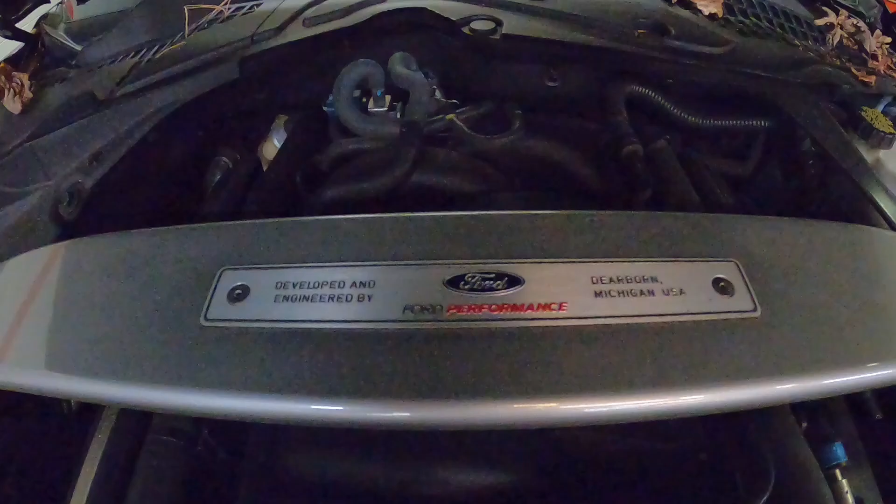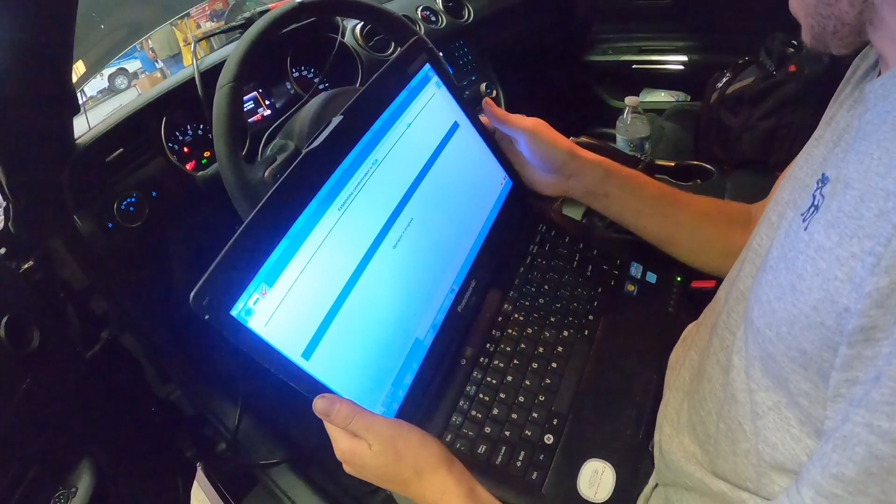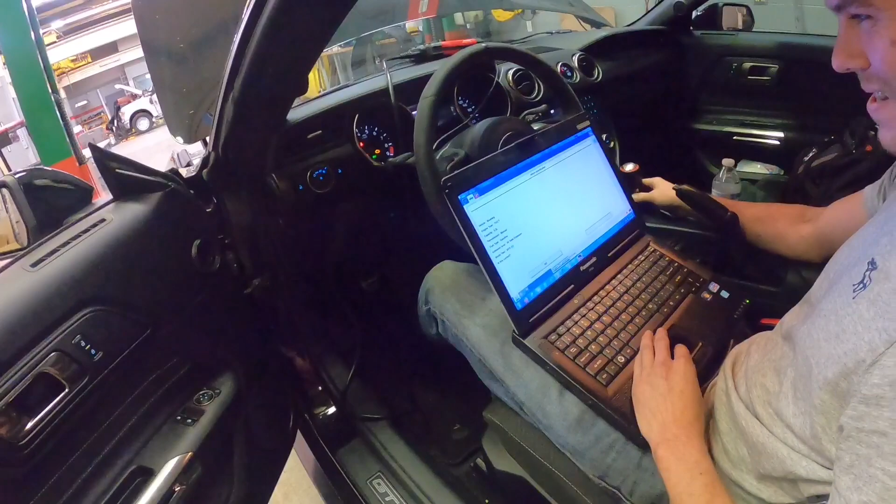So before I start taking this thing apart, my guy Smokey over here is gonna do a compression test or balance test, right? Sure. What are you doing? I don't even know. Checking compression. Compression and balance test, right? Yeah. Checking for codes. A bunch of codes. Why is there a check engine light on, dude? You're welcome. Now we want to make sure that everything checks out before I take this engine apart.

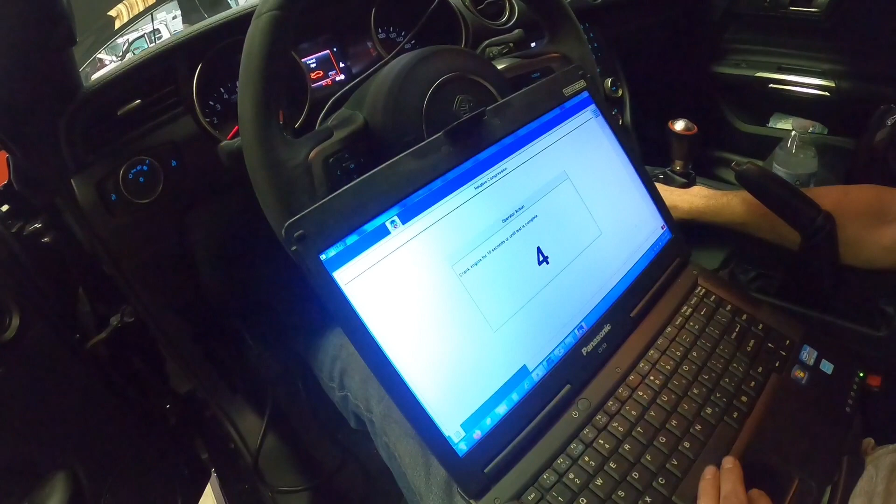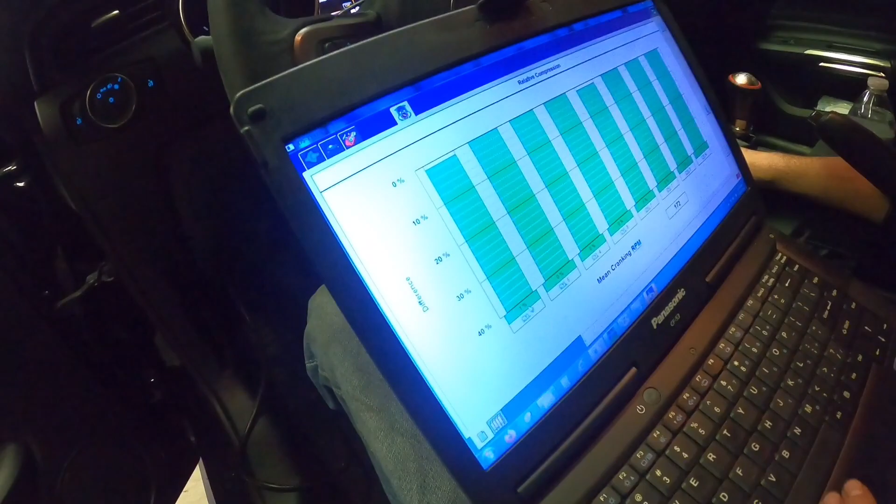Slow down, dude. Slow down. Engine failure. What? Ready. Ooh. Perfect. Is it? I mean, 1% there and 1% there. What? It's a false reading. Okay, that's all green. You're reading the fuel? No, we're checking compression. Oh, really? Yeah. How's that? It's looking good, which is good.

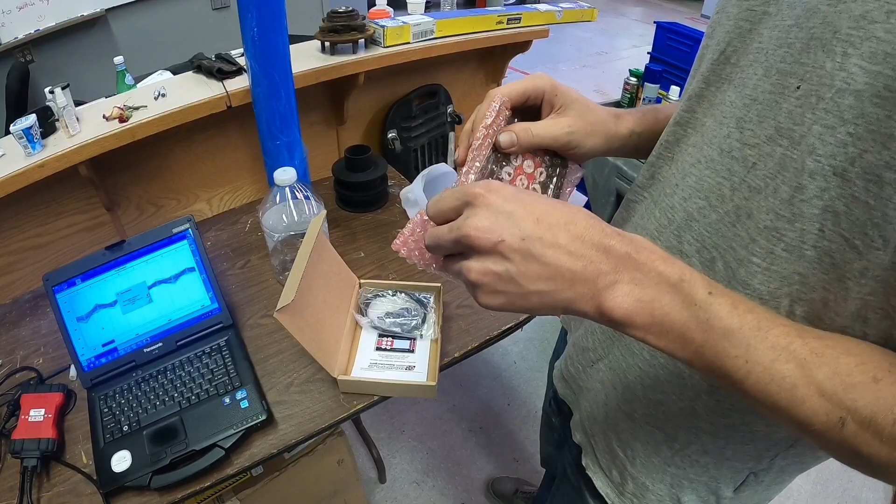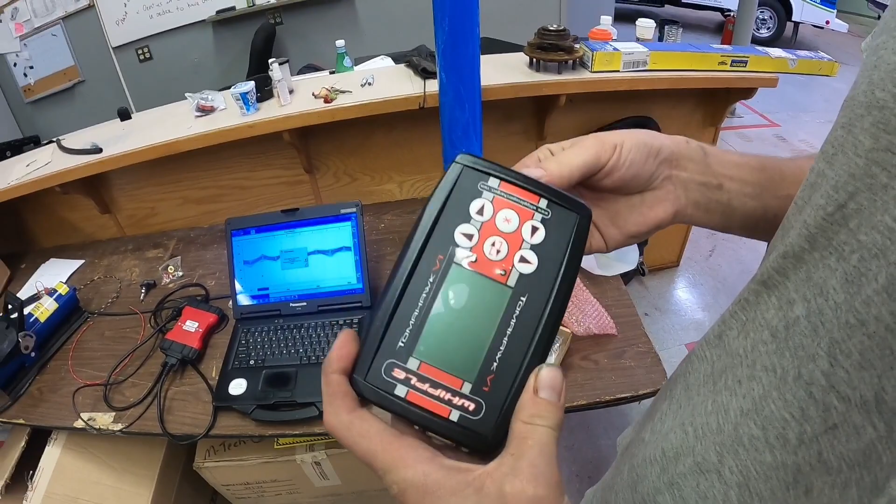I'm happy. Yeah, they can just do a drag strip? Later. Yeah. Sunday. Is that a Game Boy Color? Yeah. So satisfying to open new devices like that, right? What kind of game is that? Super Mario. Super Mario, cool.

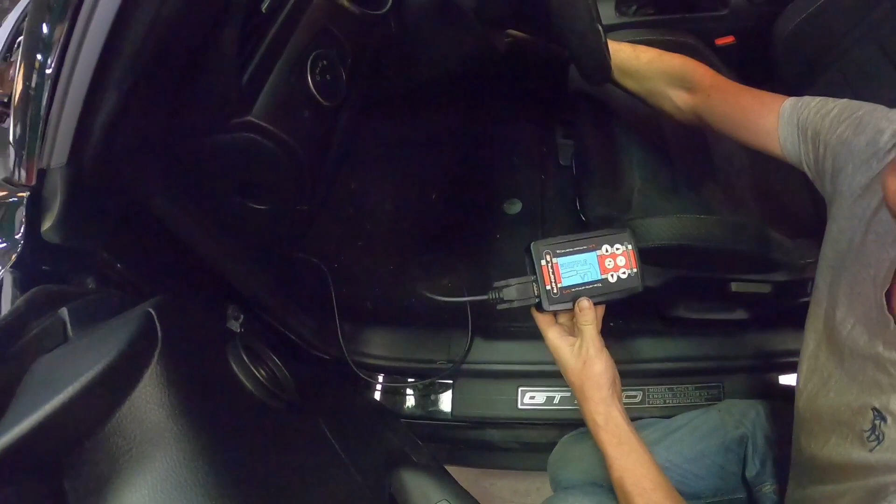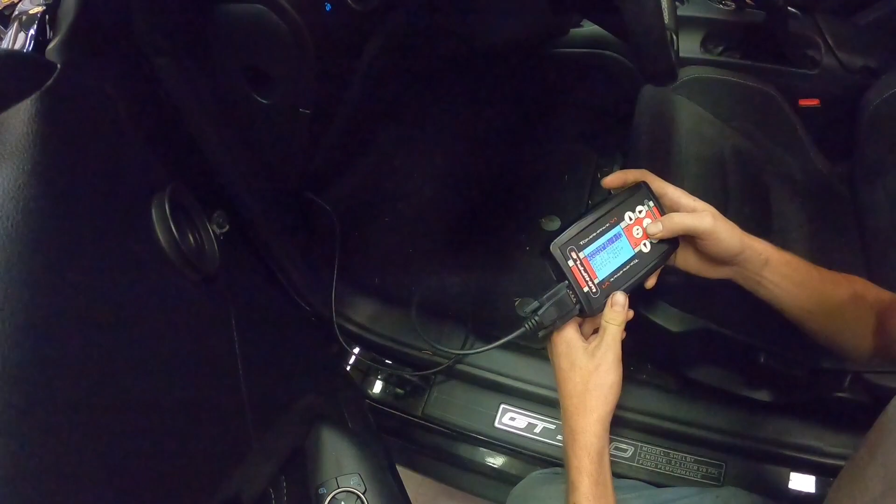Requesting a calibration from Whipple. Alright. That's it? It's requested. Really? Yep. Sweet. Thanks, man. Yeah. 24 hours. You get it. Or less. Alright, so I think we're ready to go.

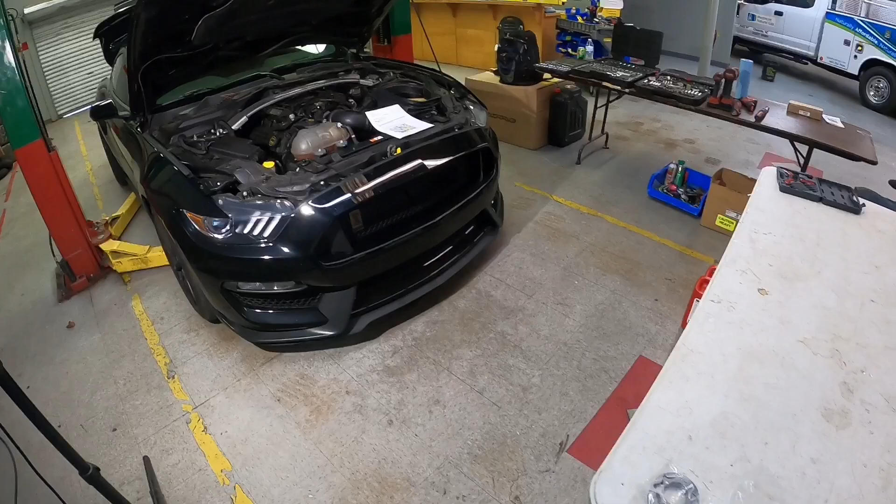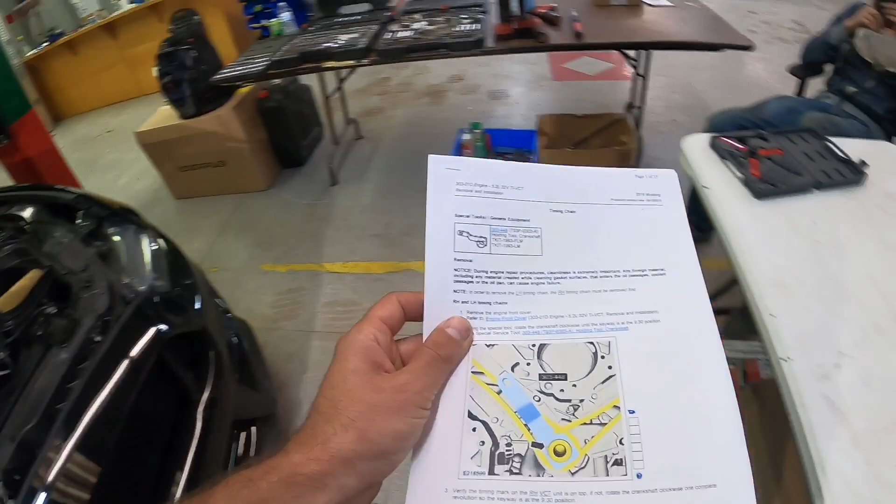Before I install the Whipple kit, I've got the new oil pump gears. Billet from Boundary. And also new, whatever that's called, gear. Is that gear? Yeah. The thing that holds the chain. Yeah. It's a bicycle sprocket. Bicycle sprocket for wheelies. Yeah. So Smokey here provided some instructions, and he said he's gonna do it for me.

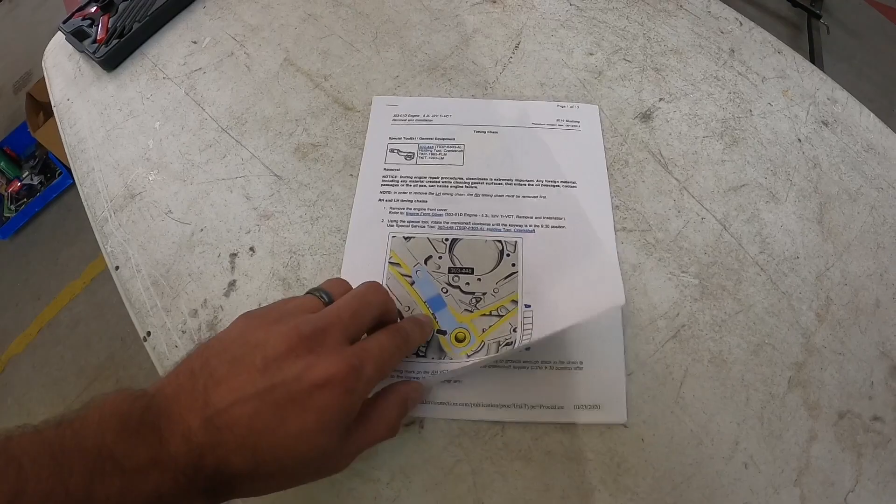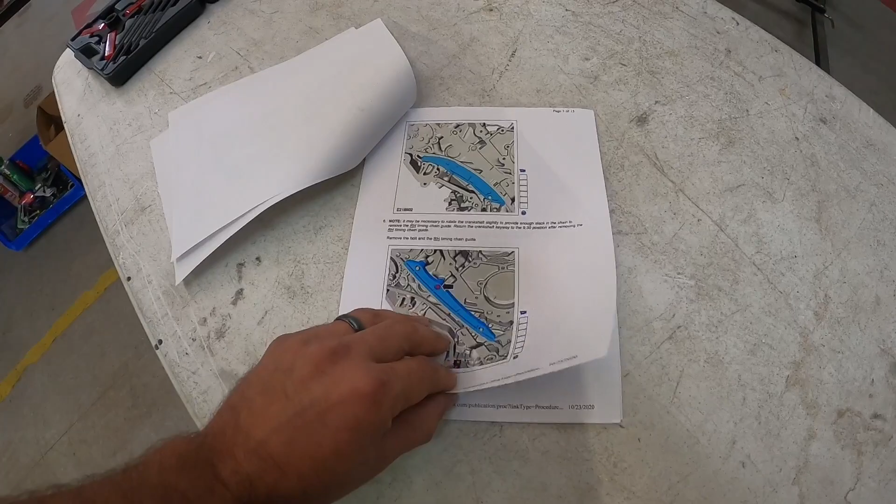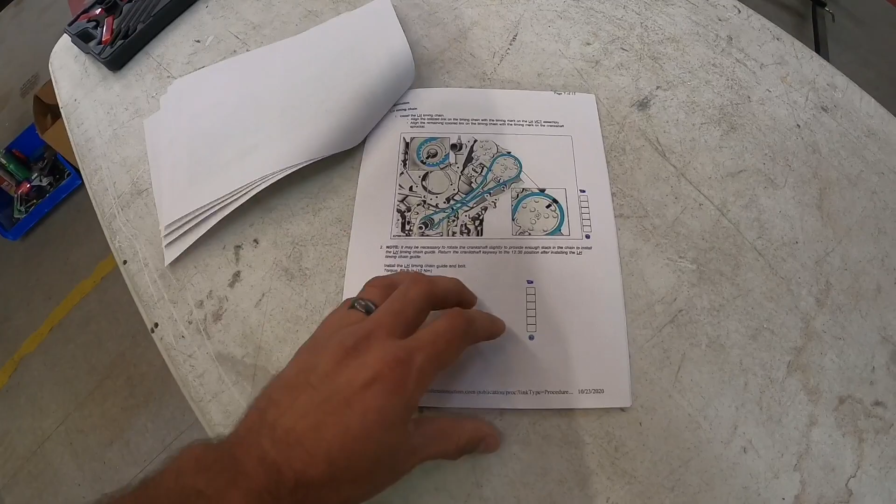And first thing, I don't have this tool, so what am I gonna do? Not use it. Yeah, it looks pretty simple. Remove that, remove the bolt, turn it, position it, don't turn it backwards, put the bolts back in, and you're good. Right? Cool.

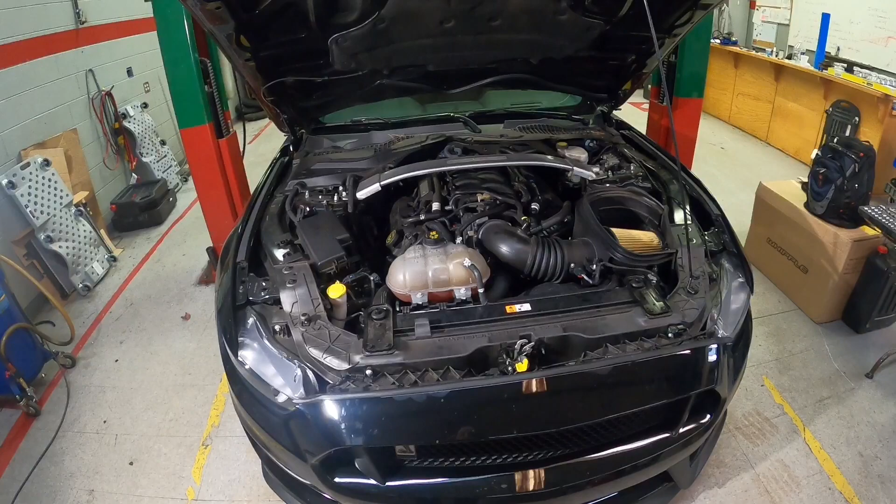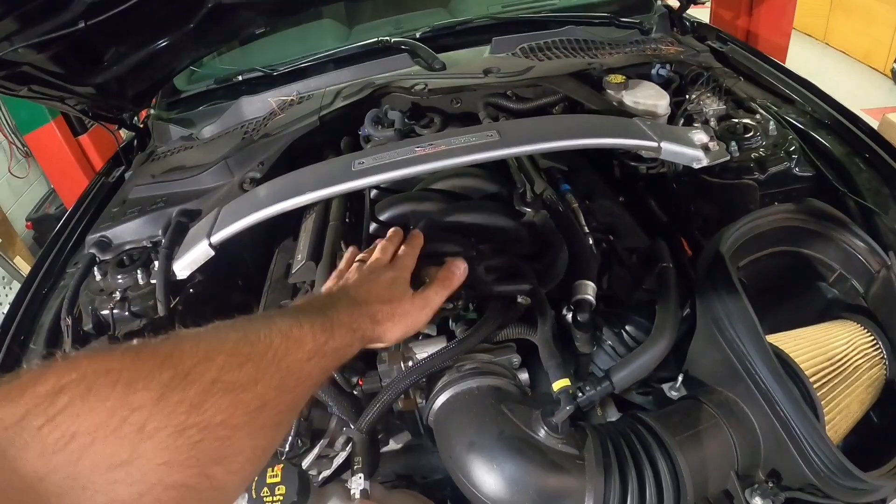So what I'm gonna do is take the front bumper off, drain the coolant, take the shields off underneath, drain the fluids, I'm gonna drain the oil also, and then supposed to drop the oil pan a little bit, so I'm guessing I'm gonna have to lift the engine up a little bit, which I have to do anyways because I gotta replace the motor mount brackets to lower the engine so the Whipple can clear this. Well, that doesn't get reinstalled, so the Whipple clears the hood, or we could just remove the hood or cut a hole in the hood. Sounds like it's easier to do that. Yeah. All right, let's do it.

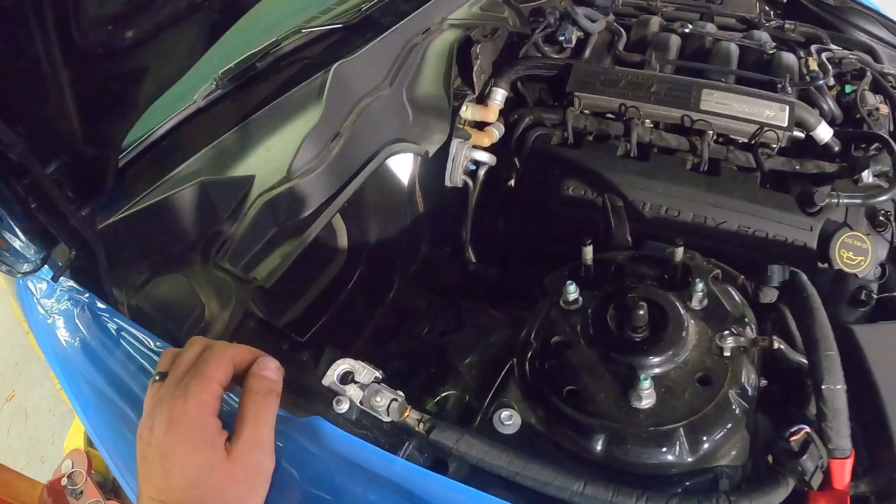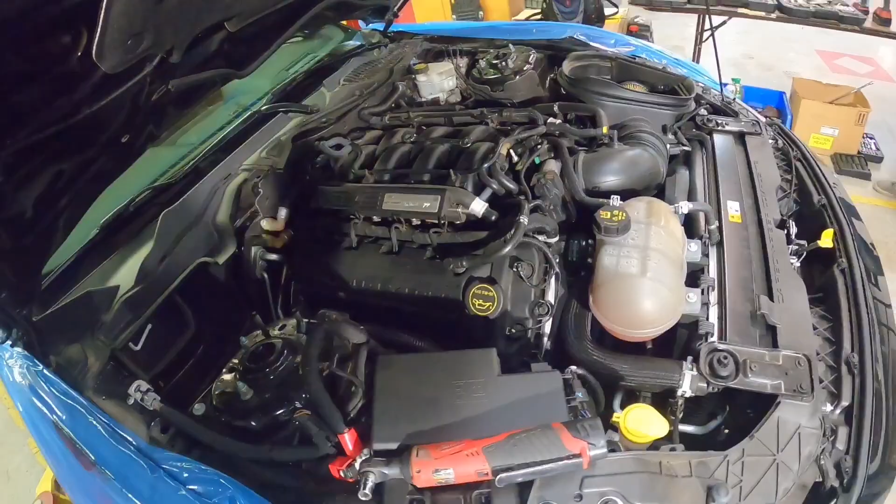Alright, so I got the battery out, battery tray out, the shield here out, strut tower, right? Strut tower, both of them out. Now I have easy access to this valve cover here because I'll have to pop that out. Strut bar. Strut bar, yep, that's what I was saying. And on this side, it's pretty easy access also. You gotta pop both valve covers off, pull the intake, drop the oil pan, and remove the front engine cover.

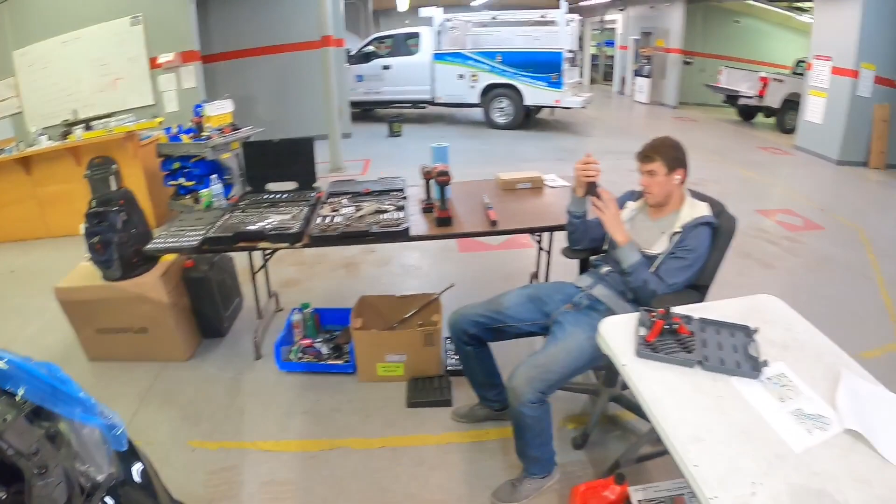So, yep. My helper over here is Facebooking live. Thanks, man. Yeah.

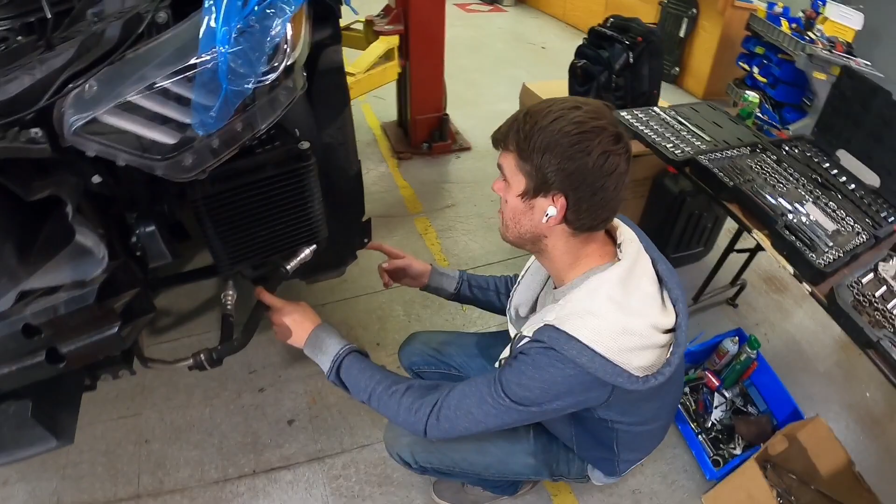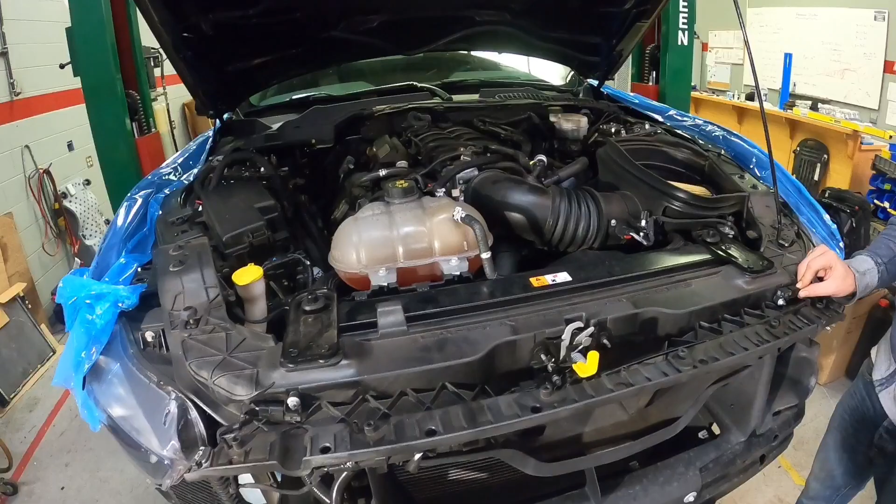Got the front bumper removed. Totally forgot to record it because of this guy. He's distracting me. But what's next? Put it back together. No, not yet. Gotta drain this coolant, drain the oil, and just remove the intake and lift up this engine a little bit. Yep.

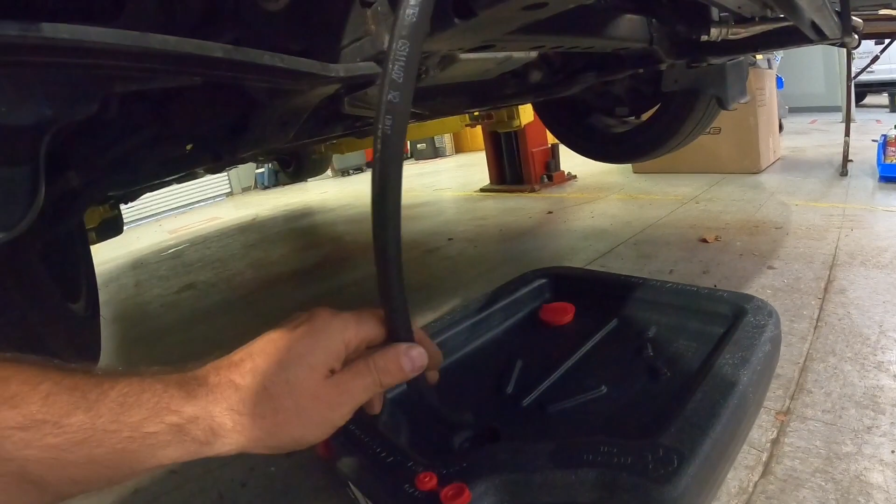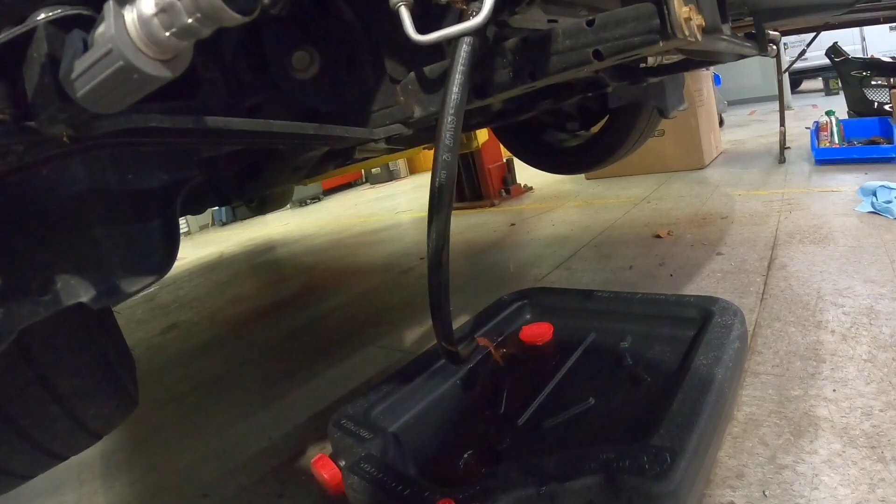Let's drain this coolant here on the passenger side. I've got a little hose connected here just so it doesn't splash everywhere. And you just turn this knob here and there it goes. There goes the coolant. Okay, gotta open this cap so there's air going in. It'll drain faster. There we go. Oh, why is it going everywhere?

So while that coolant is draining, I'm going to start removing stuff under the hood here. Starting with this filter, this coolant reservoir here, and the fans. That way I'll have access to the crank pulley. And I'll remove the pulleys and all of that, remove the spark plugs, remove the intake, cover the holes up with a plate just so nothing falls in, and go from there. Valve covers, and keep going.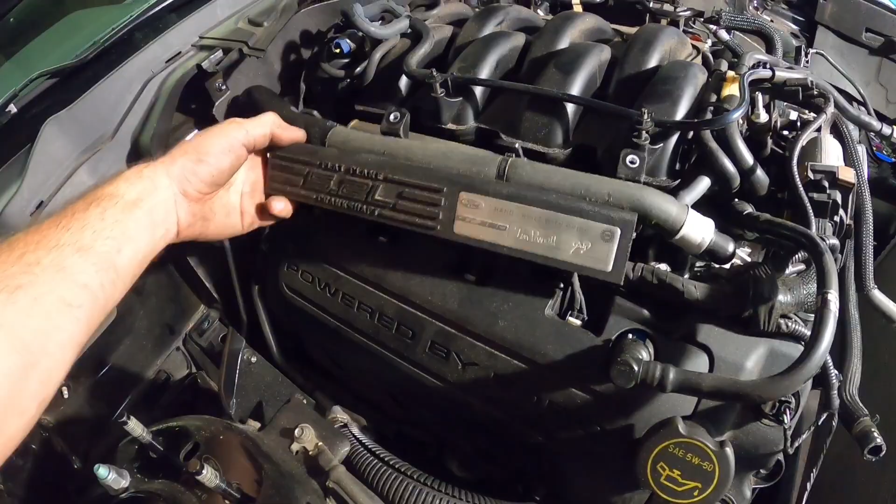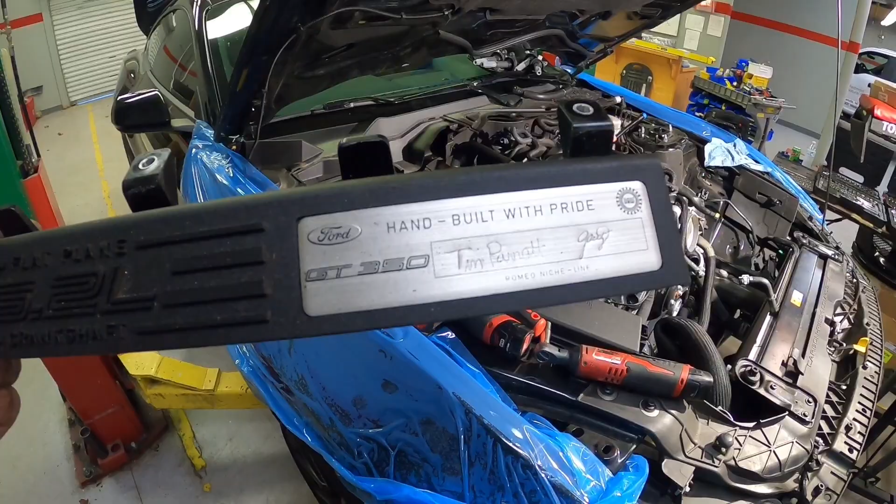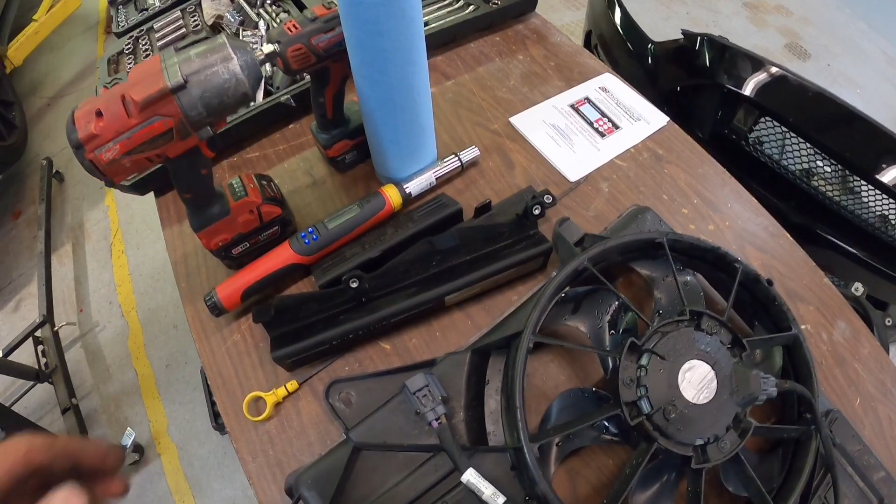Thank you, Tim. I don't know how to say the last name, but thank you, Tim, for building this engine for me. I appreciate it. But I am sad I can't install these parts back on with the Whipple on it. But I will save them.

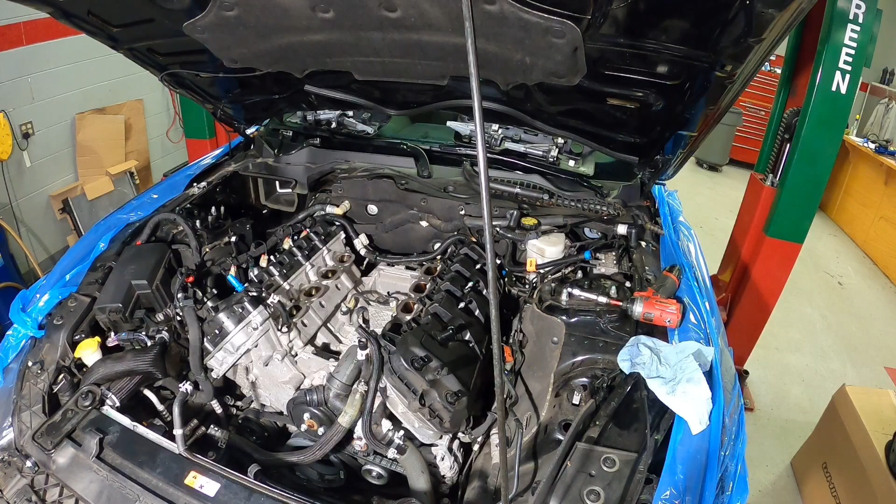Got this custom plate that I made last time I did an engine swap on the 5.0 Mustang, and it works great to cover up the holes so nothing falls in, and also to lift the engine out or up, just to hold it up in the air so I can work underneath and do what I gotta do.

So you can get these plates online, but I didn't have time for that, so last time I just welded one up, put two ears on it, just so if I need to go in the front of the engine more, or in the middle, it works great.

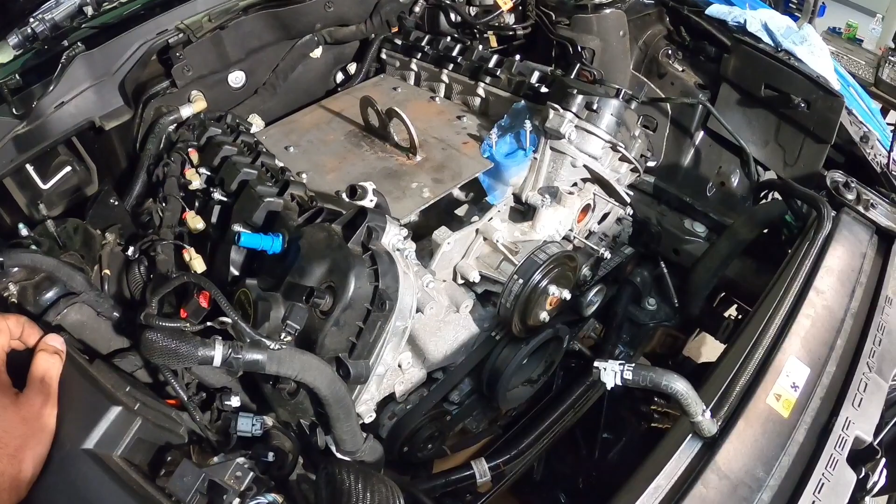So as I'm taking this apart, I started thinking, what if the previous owner already upgraded the oil pump gears and I'm doing this for no reason? That would be crazy, but I just don't see any signs of someone getting in here before. Everything looks original, so I'm hoping nobody was in here before, because I'm just wasting my time doing it again. But if I take it apart and it was upgraded, I'm still gonna change it just because I already have it and all that work, and I'm just gonna put a new one on regardless.

But I just don't think anyone has been in this engine before. I bought this car used. It had, I think, 10,000 miles on it, and it's a 2016. So I'm not sure, but I guess we'll find out.

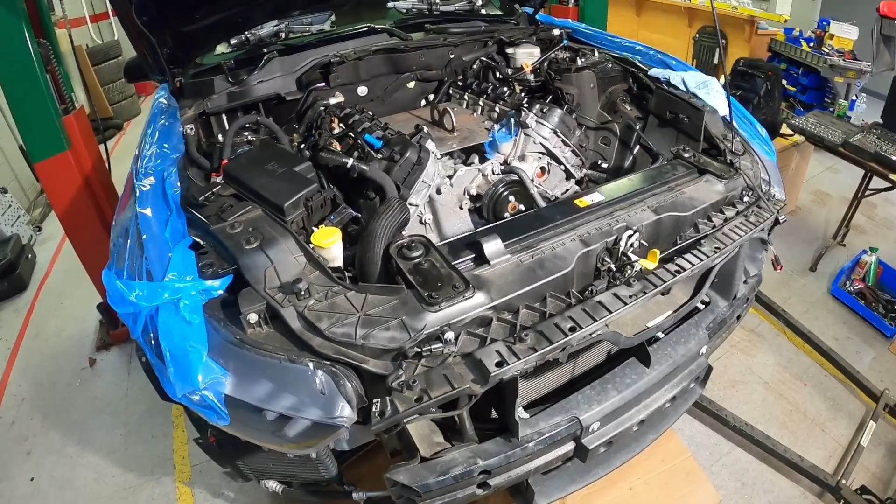I'm gonna pop these belts off. I believe I gotta remove the water pump. I don't remember. I think I do, because it looks like it's in the way. Yeah, definitely in the way because of this. So I gotta remove that and make a bigger mess. No matter how you drain this coolant, every hose you remove, you're still spilling coolant. So I just put a piece of cardboard under there to kind of absorb the coolant that doesn't make it into the drain pan.

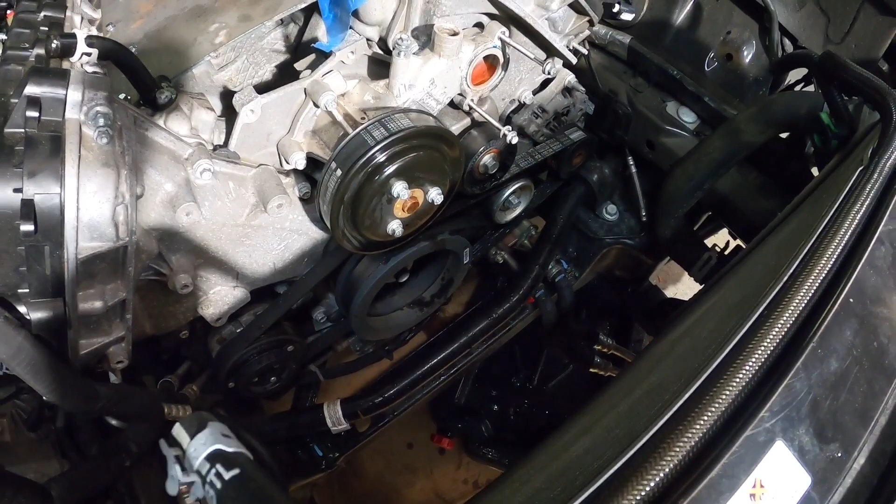There's gonna be way more coolant coming out once I remove the water pump, but nothing I can do about it. There's no other way. So let's continue this upgrade.

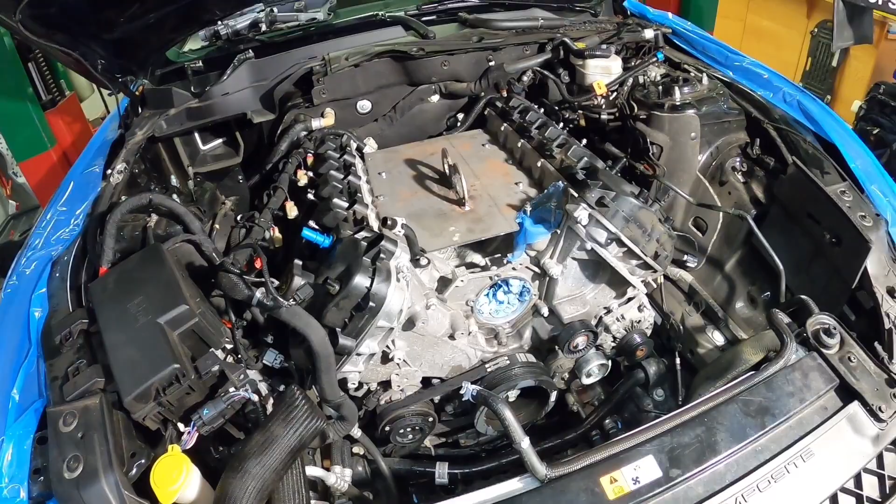Water pump is out. Now I have to rotate the engine to get this AC belt off, and to rotate it I'm going to pull the spark plugs out just so it's easier to turn the engine, and I believe I turn it clockwise, and I'm told that these engines do not want to be turned the other way because things could go wrong, especially when you're messing with timing. So clockwise only. Let's get it going.

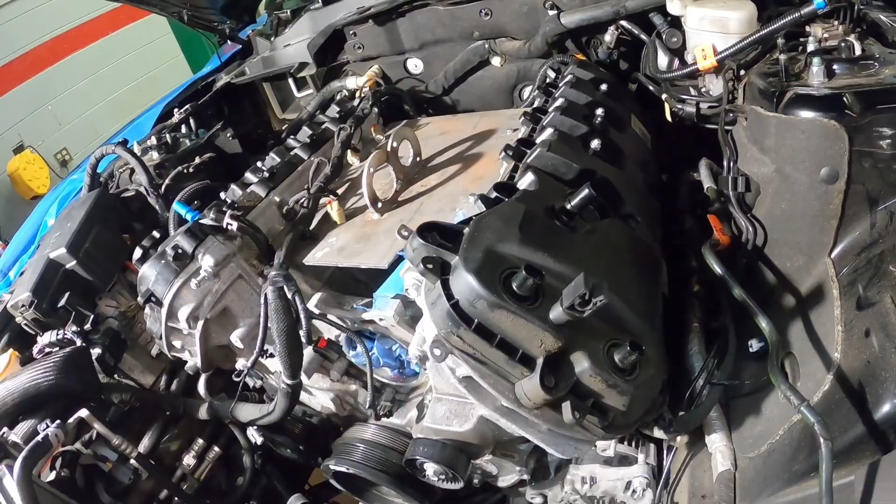At this point, looks like I'll remove the valve covers, because once I lift the engine up a couple inches to drop the oil pan, I won't be able to remove this valve cover because it'll be very tight over there on the driver's side. Passenger side is not bad, it's wide open, but over there by the brake booster it's pretty tight. So I'll remove the valve covers and then lift up the engine with that jack and secure it somehow.

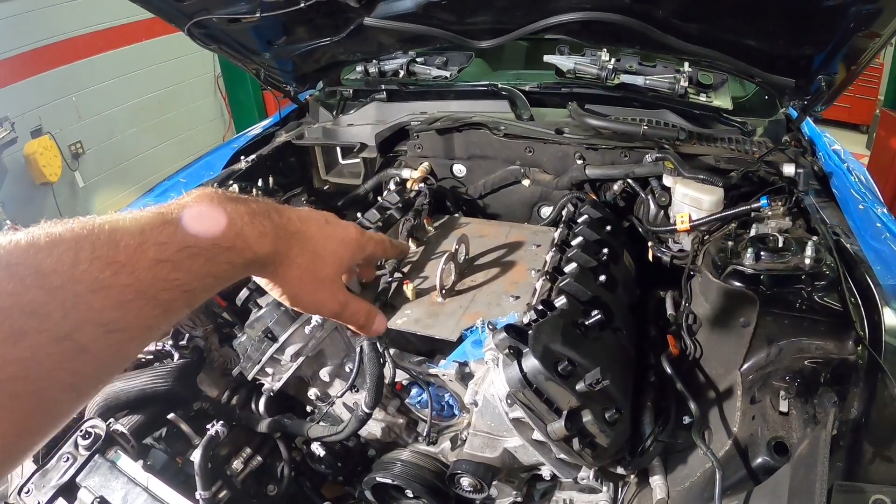I'll think of something, maybe put some kind of bar across and put a strap just so it holds the engine up, so I can drop the oil pan low enough to get the oil pump out, because I have to actually pull the pump out and then disassemble it, change the oil pump gear, reassemble it, and then start putting everything back together.

Why I'm doing this together with the Whipple install is because most of the stuff I have to take apart up here for the Whipple install, so I'm already more than halfway there. Might as well do this upgrade. I was going to just do the upgrade and then install the Whipple later, but I'm glad the Whipple came in time to where I can do it all at once and not waste any time and just start racing people or whatever comes up. But let's get these valve covers off and keep going.

Check out the setup I got. So I bolted that plate down where the intake goes and got the hooks welded on. This plate I made to pull engines, but right now it's holding the engine up off the motor mounts, so I can go ahead and drop the oil pan. That's one reason. Second reason, once I start doing the Whipple install, I gotta change the motor mount brackets, the brackets that bolt on to the engine block. So

This thing is actually built tough. I mean, it's holding the engine so far. I don't think it'll drop it anytime soon. So this was the last time I'll be using this piece on this car, because it will not be getting put back on once the supercharger sits on top of this engine. There won't be enough clearance. I like that piece. I wish I could put it back, but there's just no way around it.

And I was thinking, yeah, I could probably put some spacers under here or something, but that's not gonna work, because if I lift it up, then the hood won't close. So that kind of sucks, but it's fine. It is what it is.

So I've got the crankshaft pulley down here. Got the puller on it. I'm gonna start cranking this bolt in. As I crank the bolt in, it's gonna start pulling this pulley off, and then at that point I'm gonna get underneath the car. I've already drained the oil, but I'm gonna get underneath the car, drop the oil pan a couple inches, and then take all these bolts out that hold the front cover, and the front cover should come off at that point.

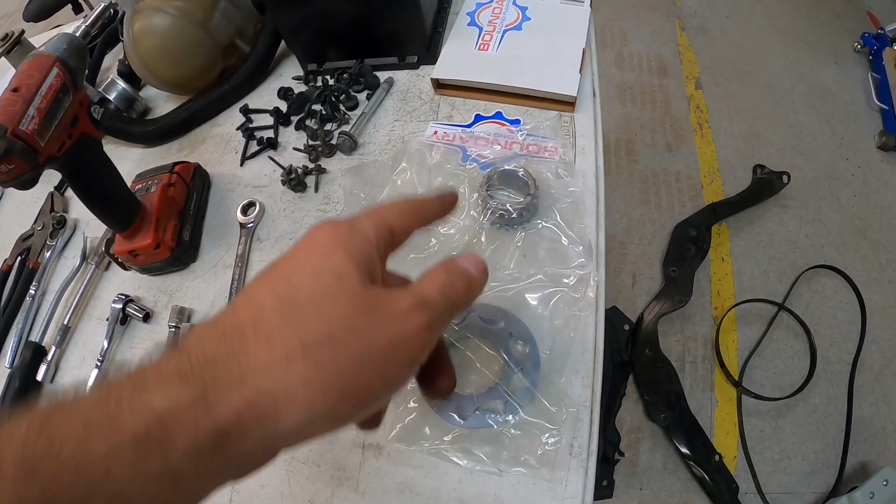Once the cover is off, then I can pull the oil pump completely out of the car and take it to a table, disassemble it, put the new oil pump gears on, and then I'm gonna feel safe. Once I install a supercharger, I know for a fact that that oil pump gear won't fail on me when I'm, you know, high revving the engine. So I'm sure there are other upgrades I could do to the engine, but I feel like the least I can do is upgrade the oil pump gears.

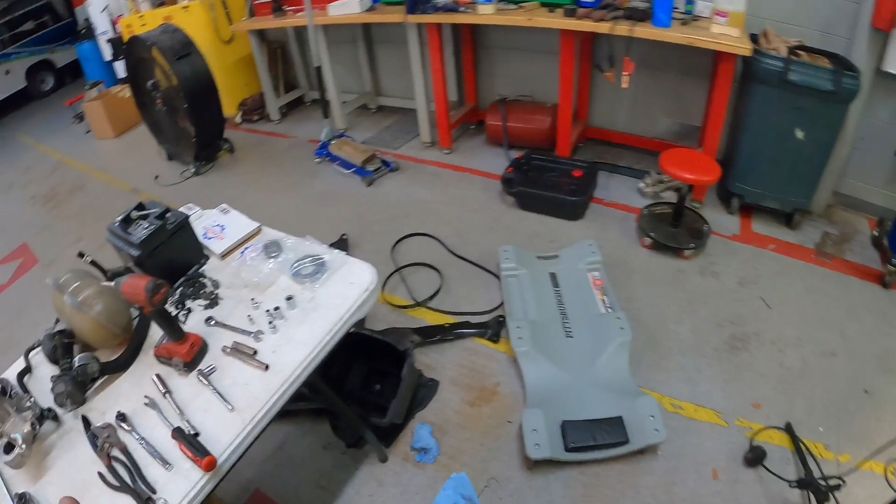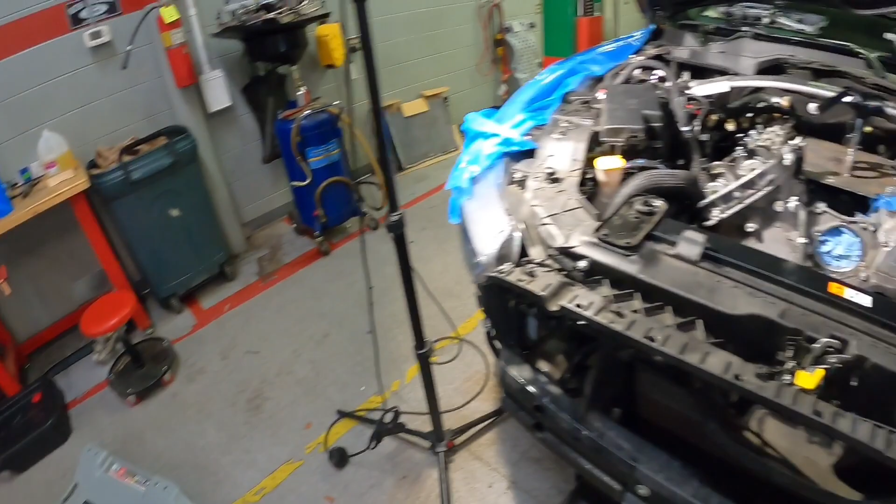It's recommended by Whipple and other people just to upgrade that piece before you lose an engine, because once the oil pump gear shatters, your engine is gone. You lose oil pressure at 8,000 RPMs and the engine is done. And this is a billet piece, so it's way stronger than what is in there. In there, I believe, is cast, and I'm told if you drop it, it shatters like glass. So I may try to get a video of that and slow it down so we could see it shatter in slow motion. Let's continue working.

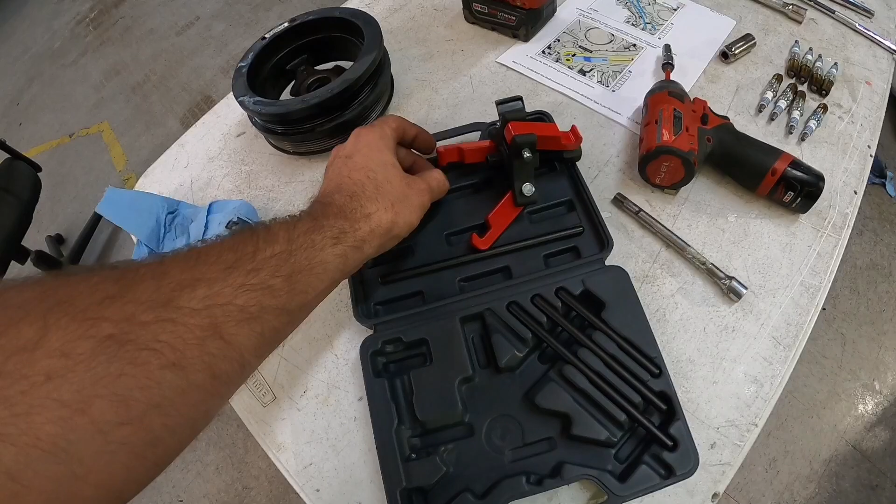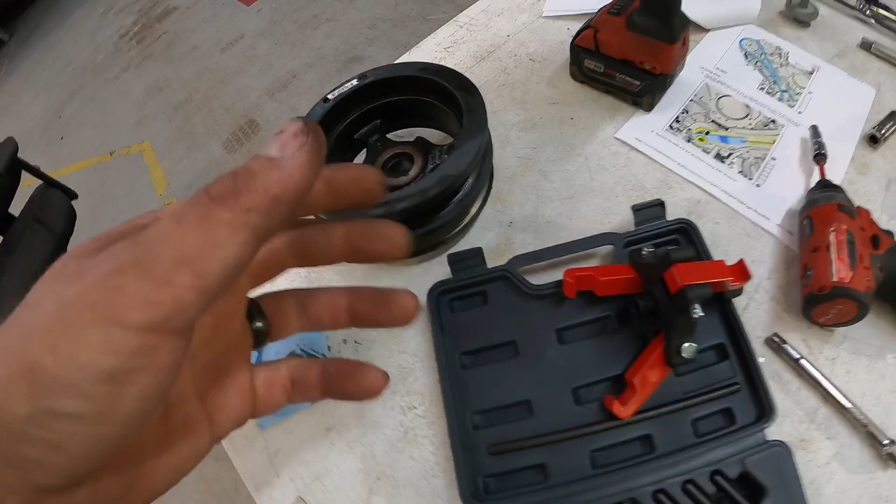This puller here, the balancer puller, I got it off Amazon, and I wasn't sure if it's gonna work on this engine, but it works great. I used the longest rod and it worked great. I didn't have any issues. I did it from the first time. I've used other pullers before where this wouldn't grip inside here, and it would just slip, and you have to do it a couple times. And this one actually worked great.

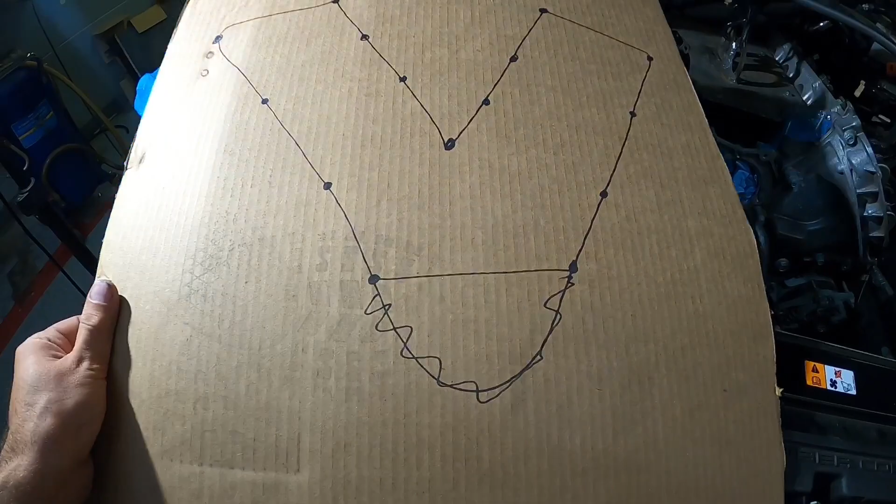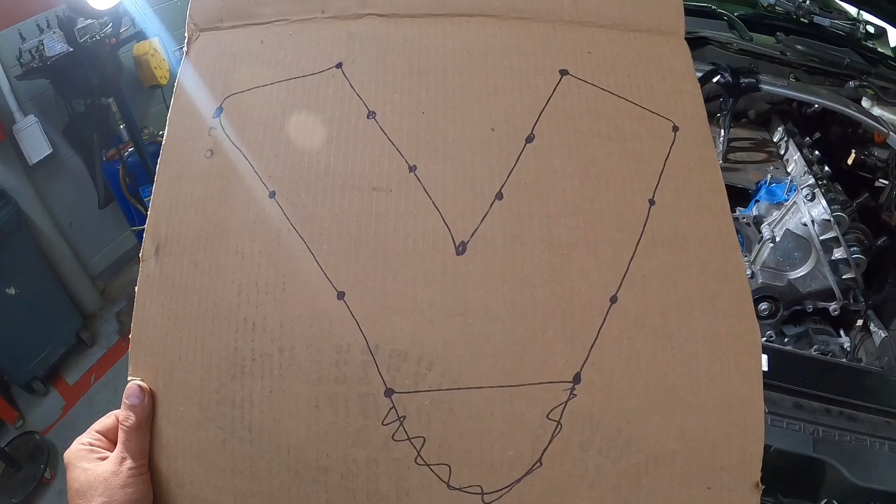Got tired of working on the engine, so I just decided to draw it instead. And my drawing skills aren't that great, they need some work.

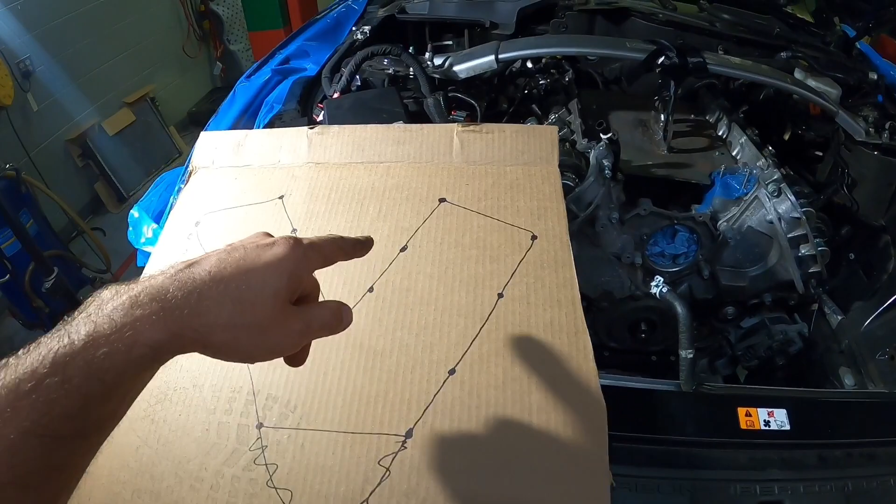I'm kidding. This is just the outline of the front cover. As I pull the bolts out, I'm gonna put them in the right places, so later I don't have to guess which bolt goes where. Some of them are different lengths, and this just speeds things up. If you put them in the right place, it's gonna save you some time. Let's get this front cover off.

As you can see, the oil pan has been dropped a couple inches. That way I can just go ahead and remove this cover. So I'm gonna start removing these bolts, put them in the proper place on this drawing here that looks really good, and we go from there. Ooh, right.

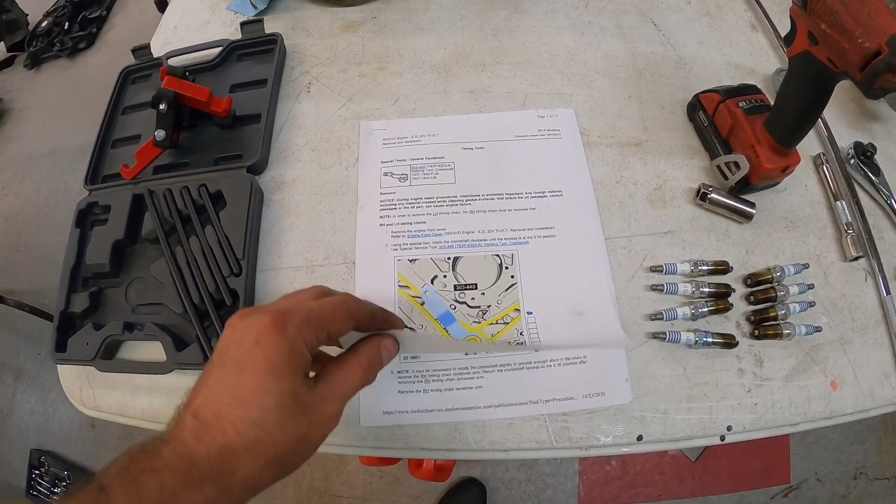So there it is. The timing chain is exposed. So now this is the part that I've never done myself before. On this type of engine, this is where it gets tricky, and there's no room for mistakes, because if you don't put the timing chain in the exact same spot, your engine will run rough, or you could even bend the valves and all of that. So this is gonna be the hard part, but I've got some instructions printed, so I'm going to read them closely and go from there.

Next day, messing with the timing here. Ran out of time last night. I've got the engine clocked at 9:30 right now. That is to remove this primary chain here on the passenger side. Once I remove that side, I'm going to clock the timing to 12:30, remove this side, and then I can remove the pump and take the pump apart to install the pump gear. So let's get this day started.

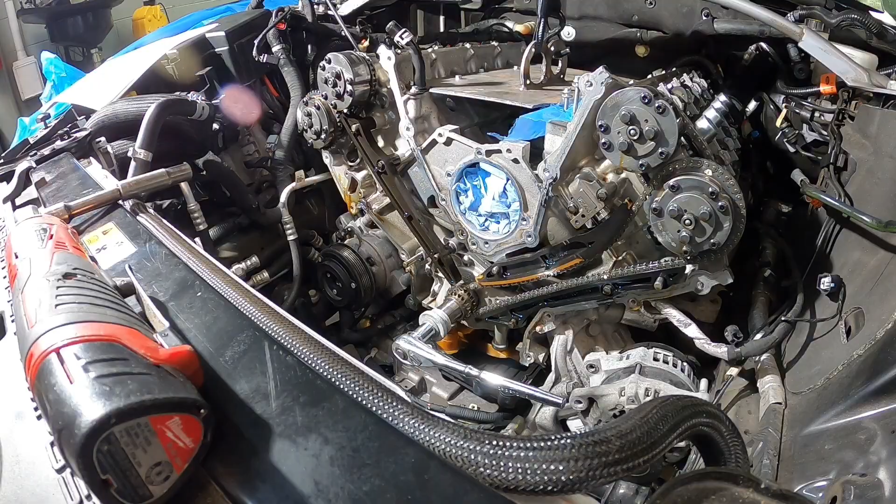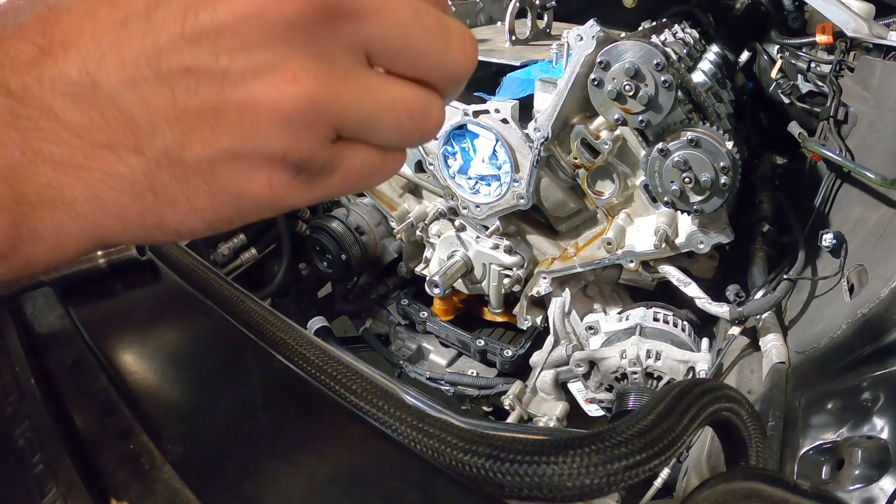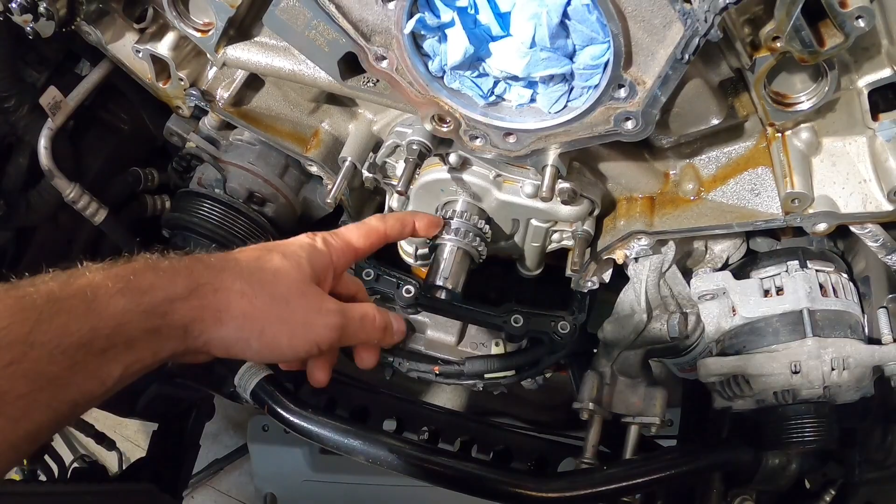Out with the old and in with the new. Totally just messed up. I put the new sprocket on, and now I have to remove it because I gotta remove the pump. My bad.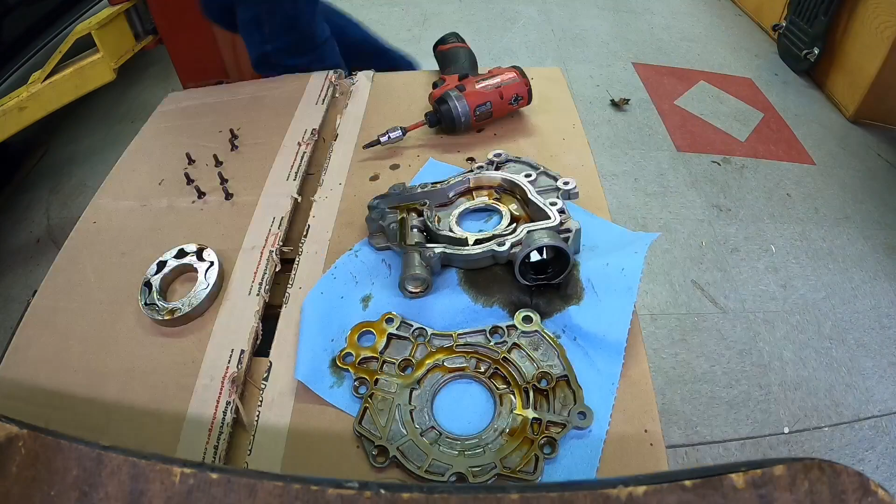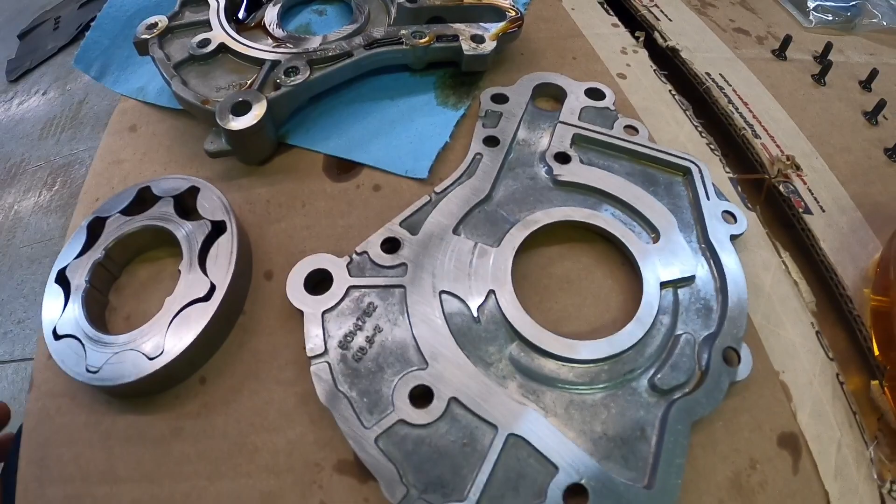So my oil pump on the inside has a little bit of wear. I'm not sure if that's normal or not. My car had 14,000 miles, so I don't know. I mean, I can't really feel it that much with the fingernail. I feel a little bit, but it's not like crazy bad.

And I would change it, but I just called the local dealer and they don't have one in stock. No one nearby has one in stock. It's on back order. Then there's one in like Texas, and I'm not about to wait 3 to 5 days to get this oil pump. So this thing's getting assembled as is with the new oil pump gear, obviously. But I think the most wear is on the actual gear itself, not the housing. So we should be good. Got some oil here. Gonna dunk the new gear in the oil, put it back together, and start reassembling everything. Let's go.

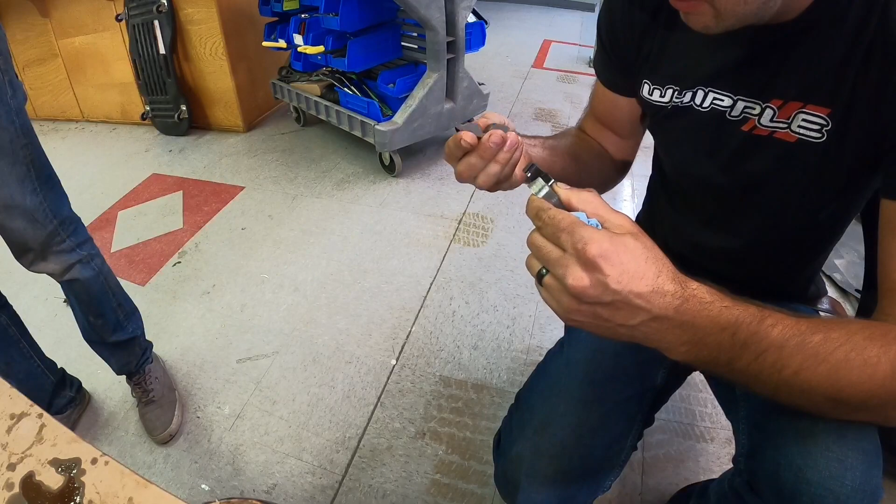Now your engine failed. It's supposed to fly into more pieces, but you see what I'm talking about? Oh yeah. Look at this quality, man. Imagine if this happens when you're at 8,000 RPM. You're not dropping it at 8,000. You dropped it at like 4,000, and it shattered. Nah, that was like 12.

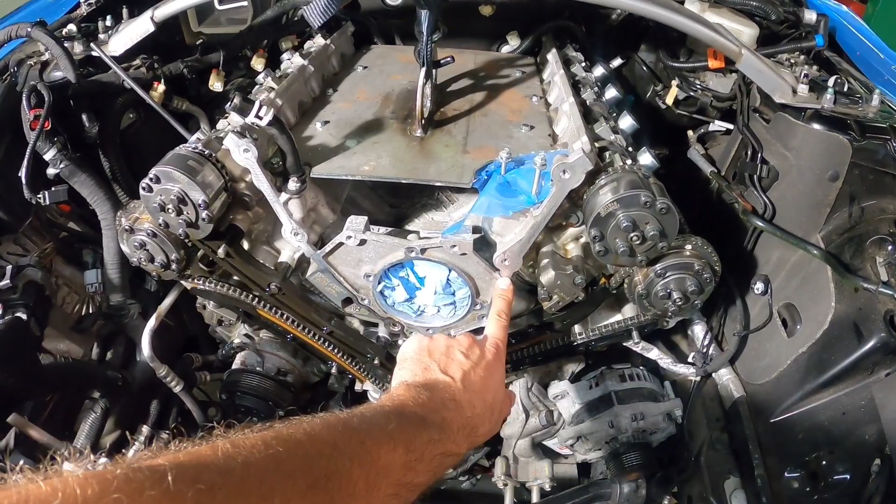Alright, so the timing chains are back in place. Did a couple full rotations just to make sure everything checks out, and it does. Everything stays on its marks. So now I'm gonna clean it up a little bit and put the cover back on, and I'll put some silicone where the head meets the block and all that, and over at the bottom, that's where they had the silicone originally. So I'll just put some fresh stuff on there and put this cover back on, mount the oil pan back in place, and go from there.

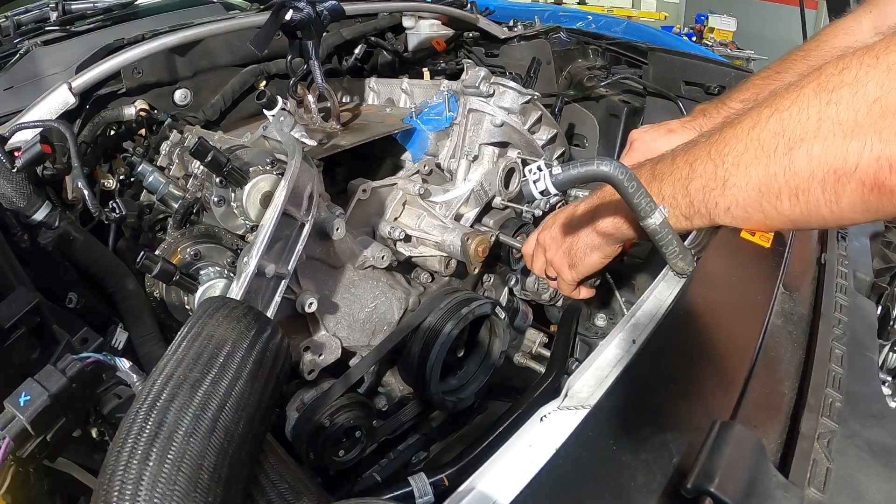So this will be it for this video of the oil pump gear and Whipple install. We didn't get to the Whipple part just yet, but I've got the cover back on, and as you can see, the balancer's back on, the AC belt's back on, the oil pan underneath is back on, and this is a good stopping point because the engine is still lifted off the motor mounts. In the next video I want to go ahead and open up the Whipple kit and get the motor mount brackets out so I can replace them before I set the engine back down to lower it for the Whipple Supercharger to clear the hood.

So why I haven't put the valve covers back on is because the engine is lifted as high as possible at the moment, and especially on the driver's side, I don't think it would fit right now, so I'm gonna hold off on that. But in the next video I will go ahead and put the motor mount brackets on, lower the engine, tighten it back down to the motor mounts, and then put the valve covers back on and continue on with the Whipple install.